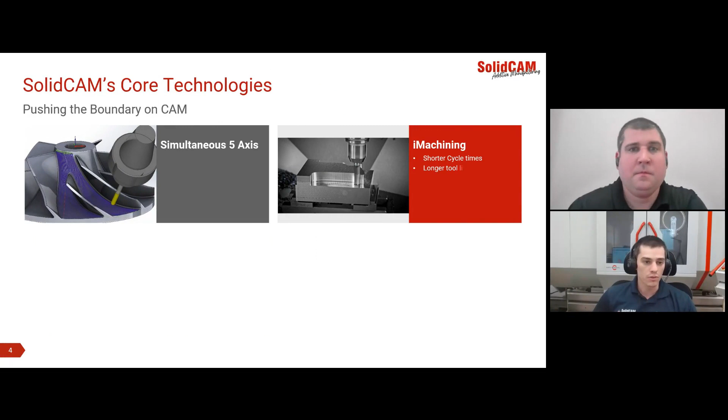Whether it's our simultaneous 5-axis, our control of some of the most advanced mill turn and Swiss type machines on the market today, or our patented iMachining and technology wizards, all of these are direct results of us trying to keep track of where technology is headed and making sure our software is always relevant to those ever-changing technologies. So as we saw Swiss machines becoming more and more the cornerstone of modern manufacturing...

...they became increasingly complex and more and more capable with every new iteration. We made sure our software is able to natively handle any type of crazy machine that those engineers would come up with. So we have unlimited channel synchronization. When a company like Tornos comes out with a machine that's got 40 axes and half a dozen spindles, we can support that natively, because we knew that was the direction technology was going in, and we wanted to make sure our customers had access to the most capable platform available at the time.

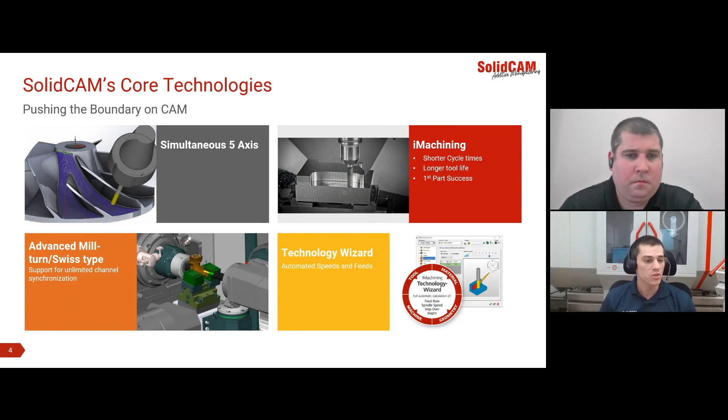A similar trend we've been keeping track of over the last few decades has been additive manufacturing. When 3D printing first came out on the market, it was a really new, really niche type of technology. While it was really cool and enticing for a lot of people, it was still a little unrefined, not quite polished yet. The technology was awesome, and there were a lot of thoughts and theories about where additive manufacturing would fit in and how much it would upend traditional manufacturing. But over the last few years, we've started to see more and more of those promises actually be delivered on. The technology has stabilized and become much more widely adopted in the market.

Really what we've seen is that additive manufacturing is here to stay. This isn't some fly-by-night fad in the industry; it's become an integral cornerstone of so many different industries. When you look at medical devices, for example, 3D printing is at the heart of so many medical implants these days that it's pretty much a technology we can't be without. So while we don't think additive is ever going to completely replace or supplant traditional methods, we do think it's going to continue to augment and enhance our traditional manufacturing technologies like CNC machining.

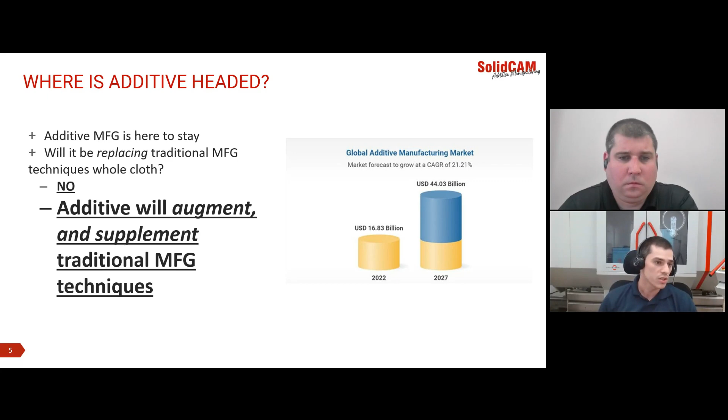And so, to keep with our theme of keeping up with the changing times and trying to stay relevant as more technologies come to market, we launched SolidCAM Additive in 2022. The entire purpose of this new branch was to become experts in the combination of 3D printing and CNC machining. We do this in a couple of different ways. One of the first things we do is our 3D printing and hybrid manufacturing consulting for machine shops.

This is where we go into a shop and look at their existing pool of resources, technology, personnel and staff and expertise they've already developed, and we see what types of parts they're working on, what types of customers they have coming in the door, and where additive technologies could fit into those existing workflows to best enhance their existing technologies.

Because again, additive is not going to come in and replace or completely upend the way they're doing things today, but it really works hand in hand quite well with the existing technologies, whether it's to gain additional capacity or to produce more complex parts. We try and find those little niches where additive can slip right into that workflow.

Another way we help with this is that we are a value-added reseller for Desktop Metal products. Some of their products we think are very uniquely suited for these types of machine shop environments, specifically binder jetting technologies in general have opened up a really interesting world of very cost-effective medium-scale production. For the first time in years, you saw an additive technology capable of producing hundreds, thousands, even tens of thousands of parts in a single system. This really fit in quite nicely with our existing portfolio of machine shops and how we thought additive could really help benefit them in the long run.

And the last thing that we do, and kind of the main topic of today, is our hybrid CAM solutions. Obviously, CAM, computer-aided manufacturing, is in our blood. It's what we do. It's who we are.

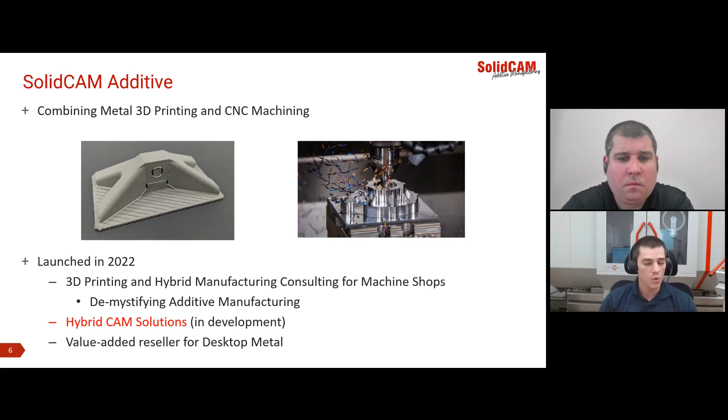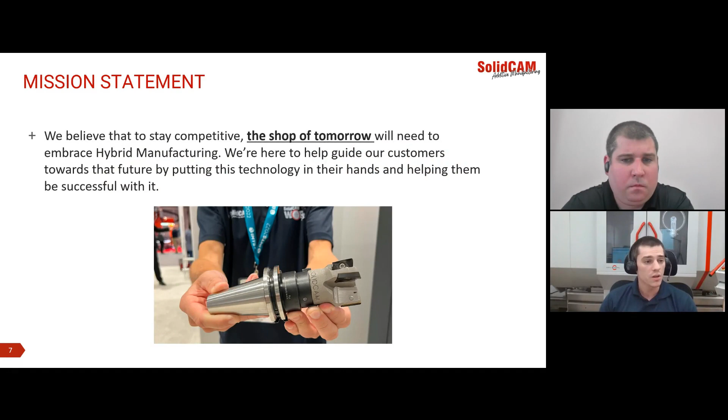So our mission statement: we believe that to stay competitive, the shop of tomorrow will need to embrace hybrid manufacturing. We're here to help guide our customers towards that future by putting this technology in their hands and helping them be successful with it. So before we talk about the CAM for hybrid machines, let's talk a little bit more about what hybrid is and what it actually looks like.

Just to keep things sane, we break this into two broad categories. All hybrid is combining additive technologies and subtractive technologies, and generally we refer to these as either sequential or simultaneous hybrid technologies.

Sequential technologies are where you take any type of additive technology you might be interested in, whether that's FDM, DMLS, DED, and you print your part from start to finish. Then you take that part, move it into an entirely different machining center, and machine that part using traditional methods. It has tons of benefits, as well as a couple of drawbacks that we'll talk about in a minute.

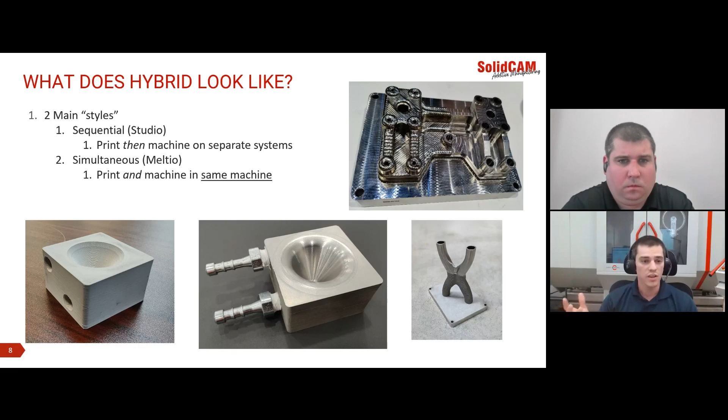Contrary to this, we also have simultaneous hybrid, which is a little bit newer on the scene, with companies like Meltio and Phillips coming onto the scene to provide these technologies to the greater audience. This is where you have a single machining center capable of both additive technologies, 3D printing metal in a lot of cases, and subtractive machining, all within that same setup, within that same machine envelope.

Let's talk a little deeper about sequential hybrid manufacturing, some of the pros and cons there. Like I mentioned, you can pick and choose pretty much any additive technology you're interested in, and that's one of the main benefits of this particular type of hybrid manufacturing. Because you're not constrained by having to physically combine these two separate technologies into one ecosystem, you have pretty limitless possibilities for the combinations. You can print with whatever technology you want, and you can post-process with whatever technology you want.

And while it's very powerful, it also has a couple of key drawbacks. One of the main ones is that you now have multiple setups, multiple operations, and multiple machines you have to transfer your parts between. Those in the machinist trade know that those are all opportunities to introduce more errors into that process. And while machinists have gotten very good at transferring parts and redoing setups and creating fixturing and jigs, every opportunity we have to eliminate those sources of error is always beneficial.

Another potential drawback with this type of technology is that you're a little limited in your options for post-processing steps. Because this relies on 3D printing a part completely from start to finish, then transferring to a different machine for subtractive operations, you're limited in what you can physically access with traditional subtractive tools. In the example on screen, this is a conformal cooling block for an injection molding die. We can surface the exterior of the part no problem on a subtractive machine — it was actually done on the Hermle right behind me — but what we can't access are those internal channels. Those have to be left in the as-printed state because there's really no other way to get at them. In a lot of cases this might be totally fine, but it's a notable drawback of doing things in this sequential step-by-step method.

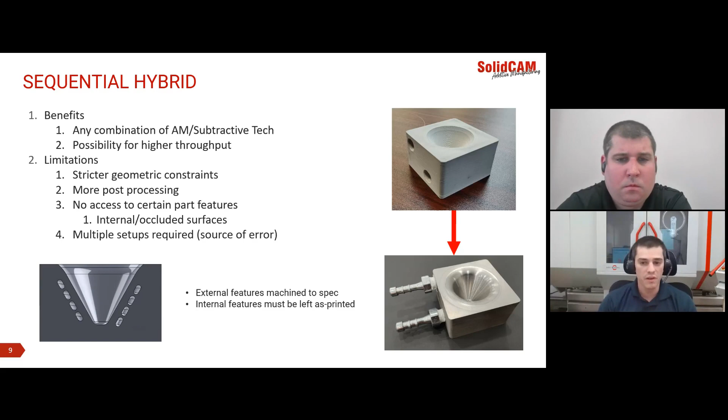Simultaneous hybrid manufacturing, on the other hand, is kind of the exact opposite. Instead of having two completely disparate processes, we take them and put them in a single machining center that's capable of doing both the 3D printing and the traditional subtractive operation. The Phillips Hybrid is a perfect example of this.

One of the big benefits here is that you get two for the price of one. When we're talking about modern machine shops, square footage in that facility is an incredibly valuable asset, one of the most valuable assets they have. So for a shop to have to decide between buying a new additive tool or a new subtractive tool can be a difficult decision. But here you actually get the best of both worlds. By having this one machine on the facility floor, you can choose day by day, week by week, what technology is more useful or relevant to your current capacity, needs, and workflow. You can combine them both, but it also means you have access to both separate technologies in the same footprint.

Another big benefit to having both technologies in this single machine with this single setup is that now you have access to regions of the parts that you wouldn't otherwise be able to access. A great example is that little cross tubing pattern you see in the bottom corner. Let's pretend the inside surface finish of those walls is really critical to us. If we did this as a stepwise process — print the whole part, then machine it — we'd be limited in accessing the interior of that part. But by having it all done in the same machine, we can choose to print, say, 10 or 15 layers, switch to our subtractive tooling, machine the outside and the inside of the part, and then continue on our way. So all of a sudden we have much more freedom of design, and we can have much more complex parts that still allow the full level of fit and finish you get with traditional subtractive operations.

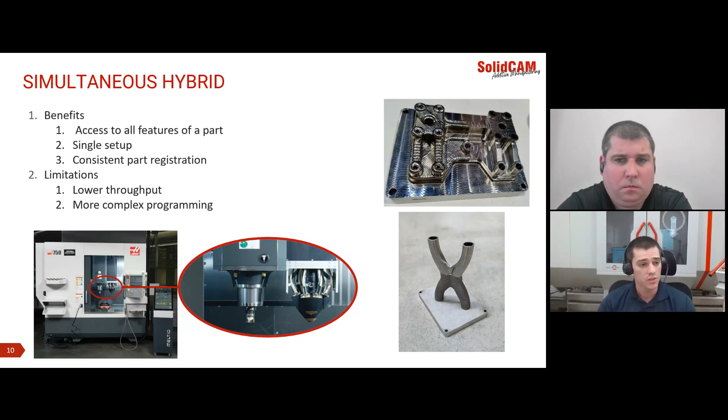So these hybrid platforms introduce a ton of new advantages into the market, but with that comes a lot of complexity. These are very complicated machines, and something we've seen in this industry is actually something we've seen before on the consumer end: the machine tool builders, system integrators, and OEMs have produced really incredible pieces of hardware that are capable of so much more than they're being used for today. A lot of times what tends to happen is that they're held back a little bit by the software that's available on the market.

We saw the exact same thing happen with consumer 3D printing just in the last couple of years. We took machines that had been, we'll call it a decade old at this point, very traditional mechanical systems, and just with some software tweaks — input shaping, Klipper, pressure advance, just the ways we control these machines — we were able to gain two to three times the print speed without changing anything mechanically about these systems, purely with a software change. That's kind of the same state we're seeing the industry at currently with these hybrid platforms. They're incredibly capable mechanical systems.

Now we just need the software tools to unlock the full potential of those platforms. We've talked with a number of users in the research and development fields utilizing these technologies, and the ideas they've come up with for what they should be able to use these machines for are absolutely mind-boggling. I'm incredibly excited to see what they'll be able to do once they have the right tools in their arsenal to really unlock those capabilities.

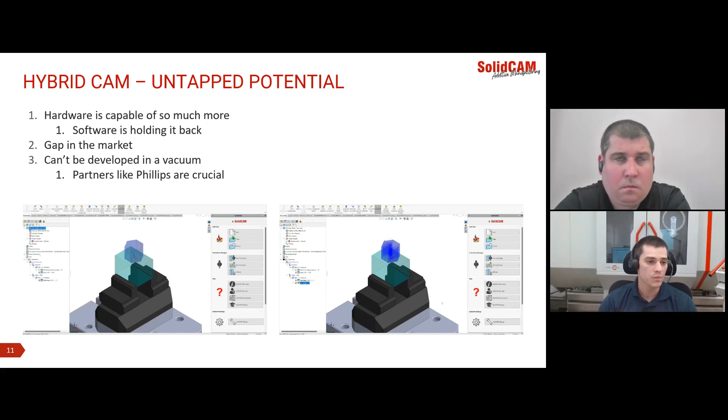Now, like I mentioned, this technology is advanced and complicated, so this isn't the kind of thing we can develop in a vacuum. Obviously we have extensive knowledge on the CAM side, but we're new to this 3D printing just like everyone else. That's where partners like Phillips come in that really make or break this entire project. They have extensive knowledge on the subtractive side, but now also on the additive side, and more importantly, they understand the union and hybridization of those two technologies. They're working directly with the customers, the beta testers, the people really pushing the cutting edge of this technology, so they know the customers, the needs, and the technology. Because of that, we're able to really leverage their expertise in this field and develop a CAM software and tools that we know are going to be useful and crucial to people in this industry.

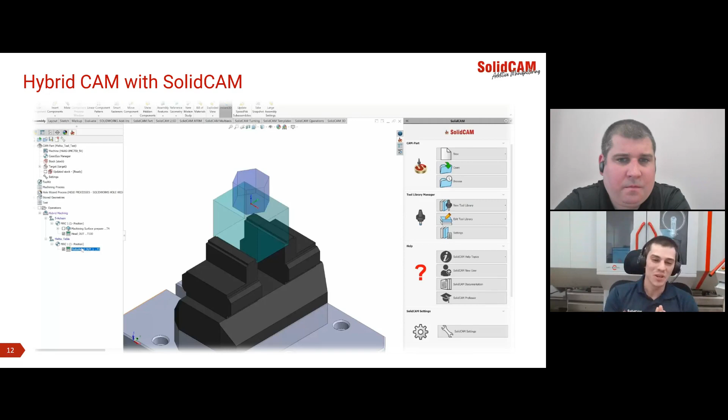Now, we talked a lot about the CAM side, so I do want to show a little teaser here. We are actively developing our hybrid CAM toolpaths for systems like the Meltio platform. Keep in mind this is still active development, so I had to twist our developer's arm a little bit to get a teaser for you guys. He wanted me to add our typical disclaimer: when it comes to software, we want function first and worry about form later in the process. So it may not be final, but you should be able to see a lot of the core functionality here today. For anyone who's used SolidCAM in the past, a lot of this should look very similar. It's all more or less the same UI, UX that we have previously.

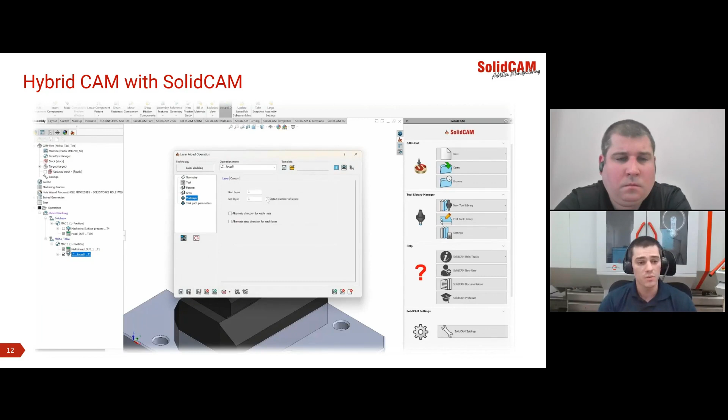Here we're doing just some relatively simple operations. We're adding this little hexagonal part onto a flat platen. We're just choosing our tools, defining our containment boundaries, and specifying what types of patterns we'd like to use to actually generate this 3D model, this 3D part. Like I mentioned, we can do this in a couple of different ways. We can do single layers at a time and then go back and machine those layers so that we have better tool access. Or we can fill the entire volume and just print the whole thing in one shot. It really just depends on what we need.

And of course, because it's all done natively in SolidCAM, we have full machine simulation as well, for things like collision avoidance and crash detection. So you can see we had our Haas head come down and machine the part to kind of prep the surface, and then the Meltio head comes down to actually deposit our material.

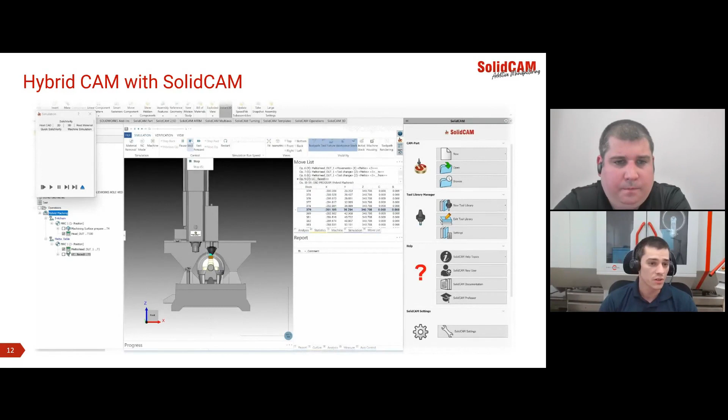So I hope you guys enjoyed that little bit of a peek behind the scenes as far as the CAM development side, with hopefully some more good things to come in the future. And with that, I'm going to hand it over to Brian to tell you a little bit more about the hardware and just what that platform is really capable of.

Thanks, Pete. So first I want to introduce Phillips Corporation for those who may not be familiar with us. We've been in business for over 60 years, with a large federal sector and commercial sector. We've been involved with Haas Automation for over 30 years and have over 30,000 machines installed. We have a variety of different divisions. On the East Coast, we have our commercial group, which typically covers South New Jersey to Northern Florida. We also have our federal division, which covers the entire world for U.S. Department of Defense, as well as a large Phillips India team. And we also have a co-op in China with Phillips Taitung. Overall, our mission is to create legendary value for the manufacturing community by unlocking solutions to propel capabilities, profitability, and productivity. And really through this mission is how we came up with our hybrid solution.

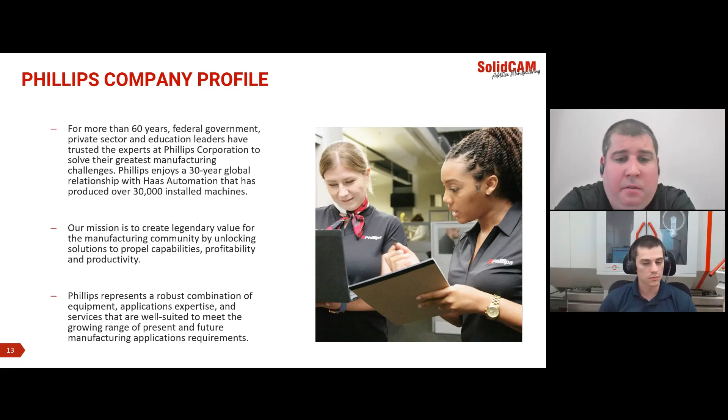And Pete, if you go to the next slide for me, please.

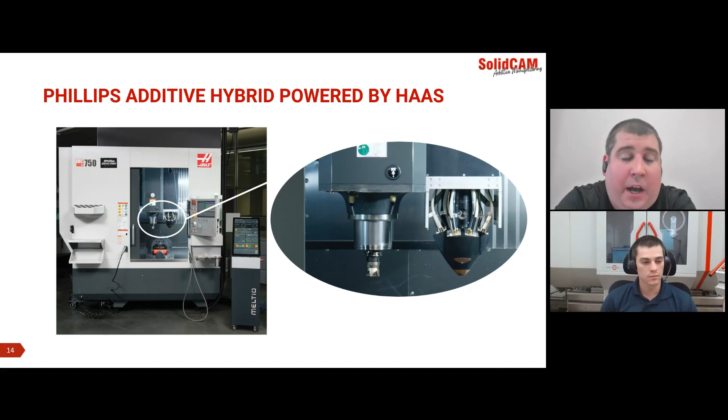So we have in this image one of the first UMC750 Haas machines that we actually integrated with Meltio's technology. We'll get into Meltio's technology in a few slides, but overall this is a directed energy deposition additive technology that we have coupled with Haas machines. Pete, if you can move to the next slide.

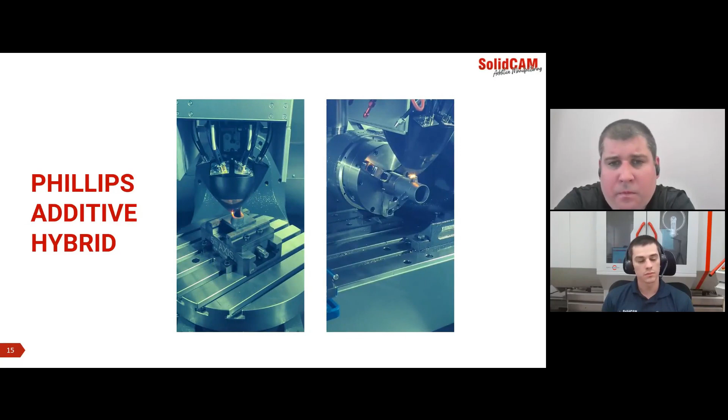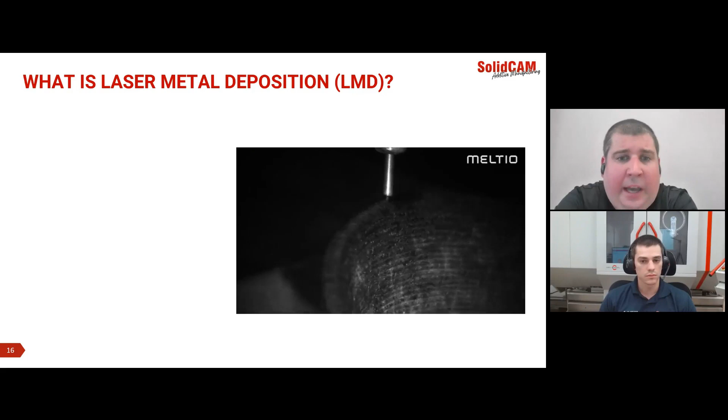Go to next slide. The reason we selected Meltio is all about their type of deposition. So with Meltio, they have a laser-based wire-fed technology. And what we feel when it comes to hybrid solutions, wire is really key. We're using a feedstock that is 100% consumed. We're not wasting any material like we've seen with some of these powder blown systems. And we have a lot of control with a laser power source, so really being able to do intricate features with the laser wire technology.

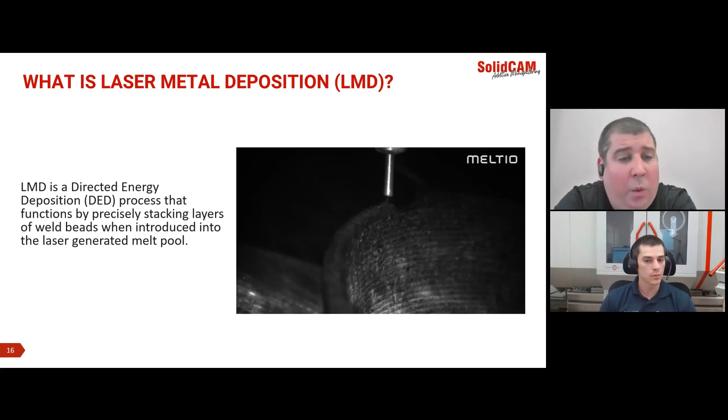The big benefit, though, for a multiple laser wire-fed system is the fact that the wire is in the center of the melt pool and surrounded by lasers. And what this allows us to do is feed in any direction. So we can feed in any XYZ combination as well as multi-axis deposition, where some technologies out there with side-fed wire allow you or force you to feed in one direction, where you need to have essentially the feedstock behind the melt pool. Because we're center-fed, that issue goes away.

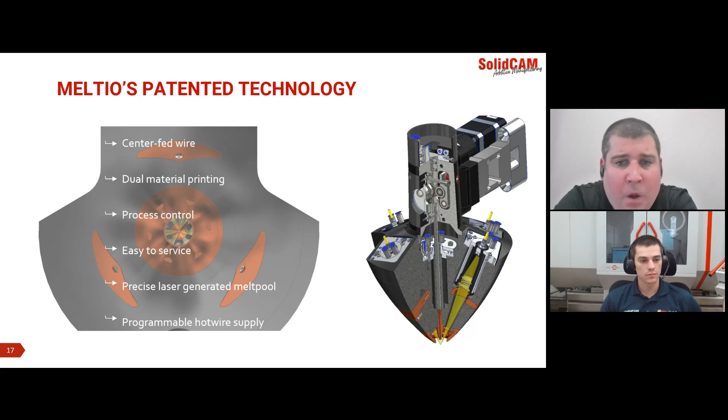It makes programming of this technology very straightforward, very similar to any other CNC toolpath in terms of process flow, just using particular additive toolpaths. Very easy to service with a redundancy of 6 lasers as well.

And overall with this process, we have a lot of benefits. A lot of questions that I get are kind of what's the resolution, or how much overbuild you need to have to allow for machining. And it is somewhat feature dependent as well as part size dependent, but general rule, about 1 millimeter or 40 thousandths per side is how much I will overbuild and then machine to final net shape.

Now as you get into larger features, parts that are multiple feet in length, you may need to add more material, or if you have a more complicated 3D surface, you may need to add up to 1.5 millimeters or 60 thousandths of an inch, but certainly not an excessive amount of material. This really reduces the amount of roughing time you may have with a conventional process compared to a hybrid one.

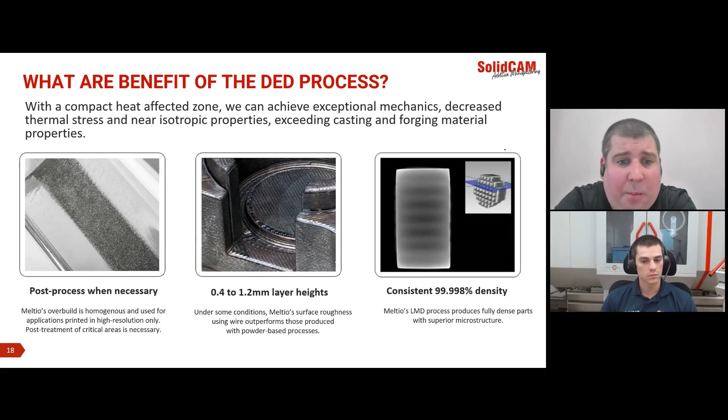Overall layer height nominal is about 1 millimeter or 40 thousandths high. And we have extremely great density with the Meltio technology, at 99.998% density, really gives you great mechanical properties and overall exceeding kind of cast properties when you compare to conventional castings. So move on to the next slide.

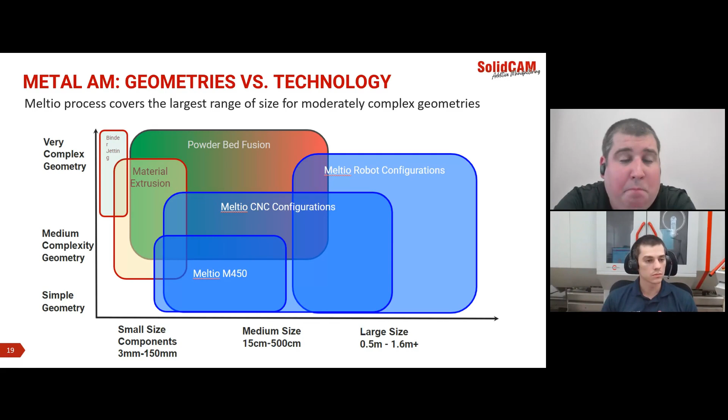With this type of technology we kind of have the middle of the road in terms of application. So powder bed fusion certainly has their market for very small, intricate features. And then when we talk about large format metal printing with a WAM technology, we're kind of in that middle of the road. We can print large parts. We also have very good resolution with the Meltio technology. So we're in that ballpark range of cubic volume, say 24 inch by 24 inch by 24 inch cube. Parts that fit inside of that usually are good Meltio or Phillips hybrid candidates for the technology.

Overall, Meltio has done a lot of work in the last couple of years to develop parameter sets for the materials listed. It is an open source platform, so you can use any welding wire that you can source, but Meltio does offer their own welding wire with the materials listed and the parameters that go along with it. The mechanical properties they have tested are available on their website for all the materials listed in this sheet.

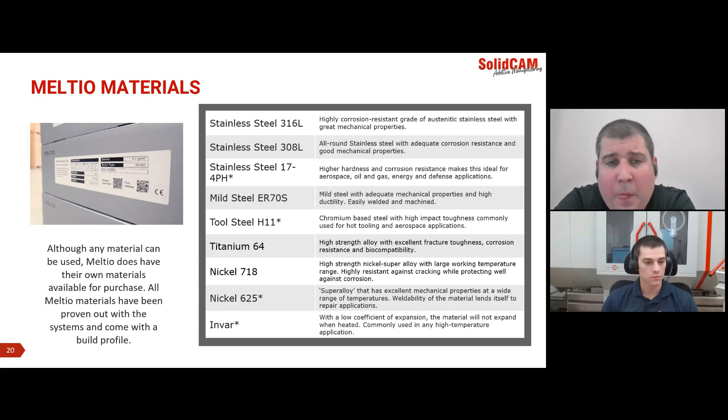On the next slide we'll talk about the differences between wire and powder. But before I get ahead of myself, I wanted to talk about the additional amount of materials we've done at Phillips Corporation. While Meltio offers roughly about 10 different materials they have parameter sets for, we've done probably another 15 to 20 materials that are all slight variances. When we talk about stainless steel, if you can find a stainless material in wire form, 17-4 is a listed material from Meltio. We've also done Phillips 15-5, different variations. So while you may only see 8 to 10 materials listed from Meltio, the platform is completely open, and we've done a significant amount of similar materials to that portfolio.

We really believe that wire is the solution for our directed energy deposition hybrids. Mostly in terms of protecting the machine tool, we don't have to worry about any type of hazards with reactive materials like aluminum and titanium being in a powder form. With wire, it's inert, so we don't have to worry about any PPE to handle the wire.

It's not a concern compared to powder. As well as storage, we don't have to worry about storing our wire in a special enclosure, simply keeping it in a low humidity environment to prevent oxidation with most materials. You also don't have the coolant contamination like you would have with a powder system inside of a machine tool.

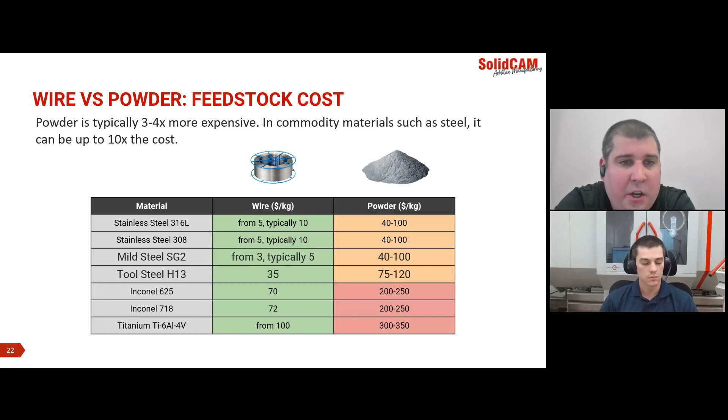Overall cost as well between wire and powder — in some cases it can be 10 to 1. But the big takeaway is that we're using all of this feedstock, where with most blown powder directed energy deposition systems, you're really using anywhere from a best case scenario of around 70% feedstock all the way down to as low as 40%. So even though in some cases we could be 10 to 1, the cost is actually even more significant than that — could be 20 to 1 because we're actually using all of this feedstock versus a 50% utilization rate.

As Pete mentioned, the overall hybrid manufacturing process really comes down to having a CAM software that supports both additive and subtractive operations. So we're programming both sets of toolpaths inside one software, creating the actual G-code to run on the machine, and then printing, depositing, and doing the final machining.

Depending on the actual application, it really depends on what the part requirements are. We find ourselves completing parts from scratch where we print the entire part and then do all the post-process machining. But if we have a reason to go back and forth, that's certainly something our system can handle — really to get access or reduce the stick-out of a tool, to have a nice rigid setup where we can go back and forth and print-machine to reduce those kinds of extended tools that might be required.

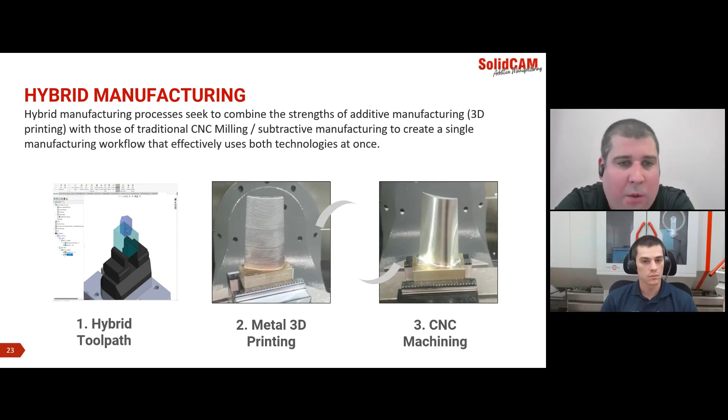Radial slicing, if you're doing a spline or sprocket type geometry around a shaft, where you're rotating about a certain axis as you're slicing. And then one of my favorite ones is doing a spine slice, where you're given a drive geometry and we're actually changing feed rates to generate a non-linear layer height. This will allow you to do tubular types of shapes where we're automating the change in feed rate to achieve that curvature.

Some of the applications we find ourselves working on with these directed energy hybrid systems include feature addition, where we're taking a substrate, in this case a shaft, and depositing material on it, so the bulk of the component might not be the deposited material. This allows us to reduce cycle time if we can avoid printing a generic shape. If you can find a particular diameter stock that has one little feature, you can just print a single boss rather than printing the entire shaft, saving a lot of time versus doing a full feature addition.

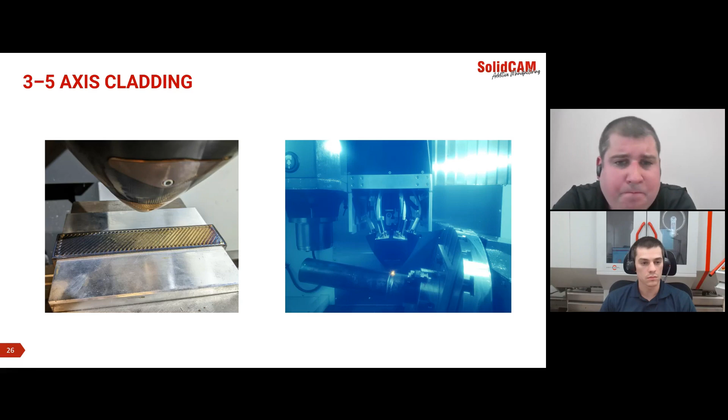I've seen some of the questions popping up in the chat — this is probably one of the areas we get the most questions on at Phillips: how is the system programmed? Right now we use a series of M codes to communicate between the Haas controller and the Meltio controller, turning on things like laser security and making sure we have a layer of protection so there's no way to open the door while the laser is on, to protect the operator. We turn on things like the actual lasers and deployment of the head.

So the head is only deployed when we're actually printing, retracted when we're doing conventional machining. We also have an additional M code that will allow us to apply a head shift in the background, so that way we handle that XY shift between the milling spindle and the additive head.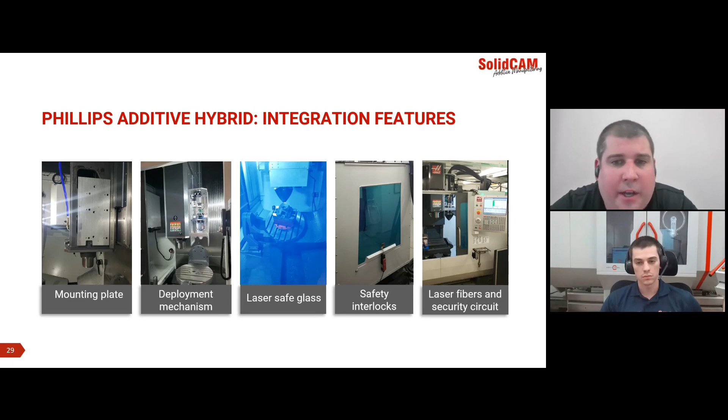Across the different Haas machines, we integrate on pretty much all Haas VF machines, the large majority of UMC machines, and the VMs and tool room products. Some machines we can do, like the smaller TM0s and VF1s, but you get so much more build volume using these larger format machines that for the cost of integration, it really makes more sense to start with a larger machine travel on the Haas side.

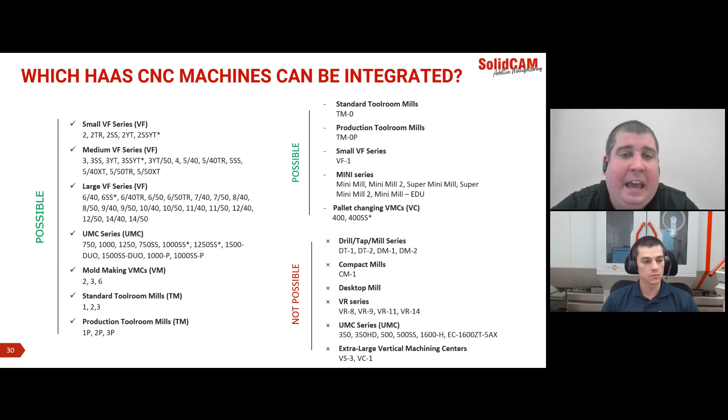And then there's some machines that physically can't be integrated, some of those smaller drill tap machines or drill mill machines just physically can't have the Meltio system fit inside the travel.

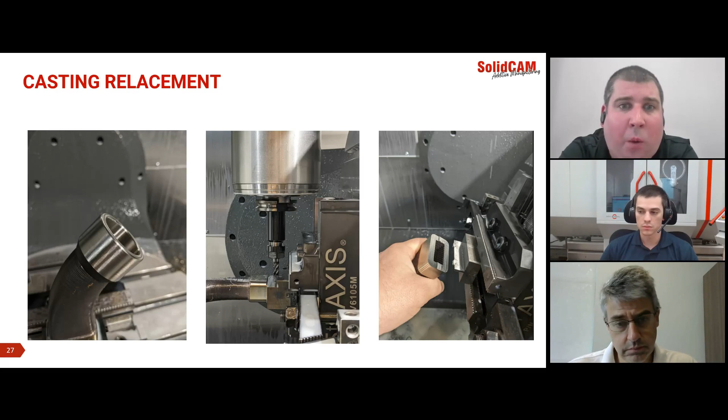We also lock out the coolant pump while we're doing additive work, so there's no way for an end user to accidentally turn the coolant system on while you're printing. My kind of joke is that it would be an expensive accident if you were turning the coolant on while laser welding, but that's prevented with some macros we have in the background.

In terms of overall protection, we have systems that we built three years ago now, running flood coolant every day, without having an issue with coolant contamination on electronics or optics.

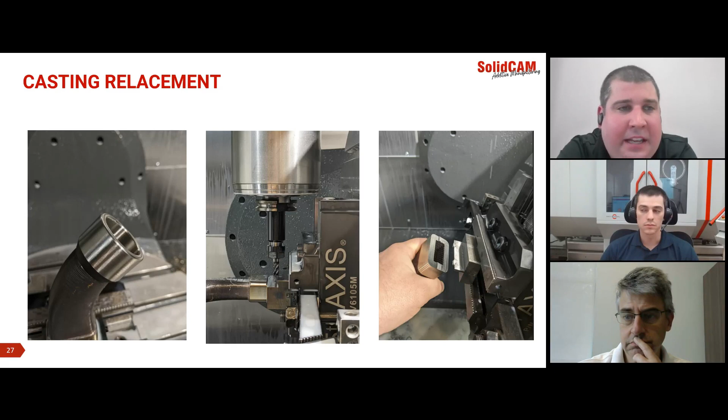Is inert gas part of the Meltio head? The inert gas flows through the actual optics, as well as creating an inert bubble around the actual process. In the Meltio head, the gas comes out of the gas nozzle, which creates that localized inert environment while we're welding. So we do not flood the entire chamber of the Haas machine.

Another viewer asks, could this technology be adapted to a CNC lathe? Since we're using lasers fiber coupled to our collimators, one of the big challenges is that most lathes are turrets. How do you mount a deposition head coupled with fibers to a laser source on a turret? That's not physically possible. What you'd need is a robotic arm with the deposition head mounted to it, with a door that automatically opens and a laser-safe cell around the lathe. That's how we'd handle a process that needed to run on a turning center.

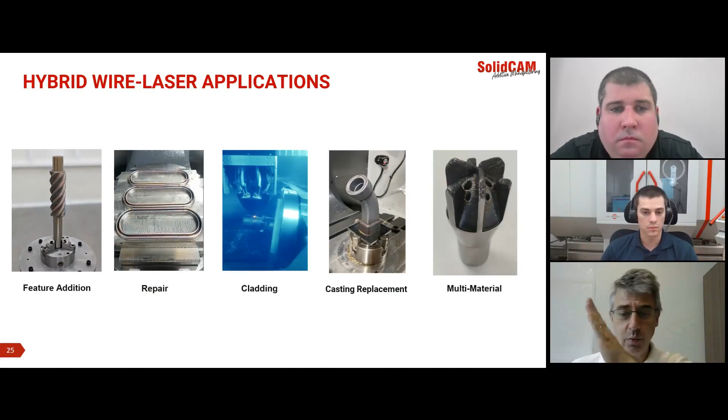This one's a good geometry question. On the spine-based slicing of the tubes, where you showed one wound back and forth, how are you managing the different bead heights between the inner radius and outer radius? One unique thing about this toolpath is we give it a centerline spine curve, and based on the relationship between that spine curve and the actual geometry—internal versus external radius—we give the toolpath a slope function. This lets us set a nominal wire feed rate and linear feed rate, as well as a minimum and maximum.

By tuning the minimum and maximum to what the process can handle, there's a physical limit—we're not going to print a 4 or 5 millimeter tall layer. There's a finite layer height you can't violate. Normally our nominal layer height for single wall is around 0.5 millimeter, and for solids it's about 1 millimeter. We can go a bit lower than that—for a spine slice we can handle about a quarter millimeter, around 0.010 inch, up to about 1.5 millimeter. So we give it those two points on the curve that intersect with our nominal feed rates, and the software computes the feed rates for us. You're constantly changing feed rates but maintaining wire feed rate—wire feed rate in this toolpath stays consistent while we alter the linear feed rate.

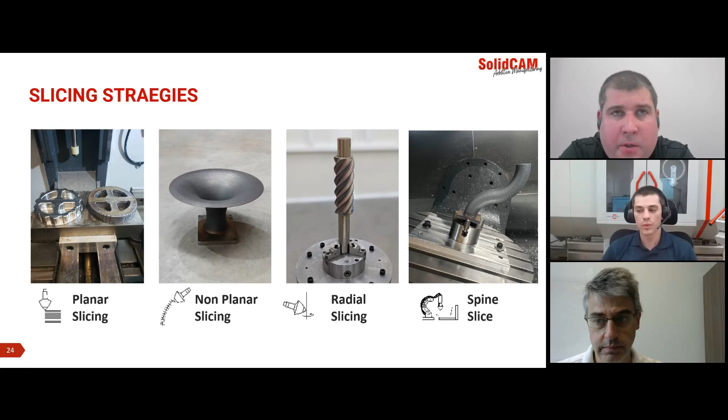That's part of the Phillips hybrid integration. So it's something that our team at Phillips Corporation, we design and use the Rotary Unions, especially when it comes to 5-axis machines. That way, when we talk about a table 5-axis machine, we have to have a Rotary Union. So that's something that we develop, as well as make custom for our customers. That way, if you're using a particular type of work holding, we incorporate that into our design. So that way, if you're using Lang or 5th axis, we'll use the bolt patterns for those subplates or fixtures.